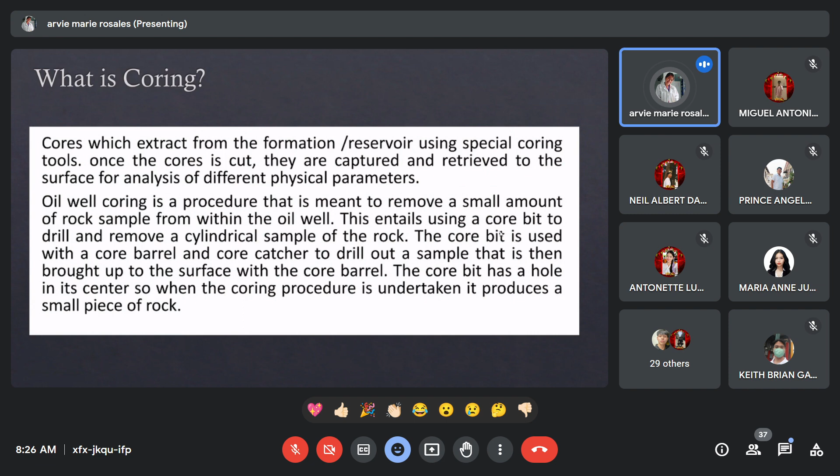So our core sample is usually cylindrical in shape. The core bit is used with a core barrel and core catcher to drill out a sample that is then brought up to the surface with the core barrel. When we define a core sample, it is a cylindrical section of a naturally occurring substance, usually obtained by drilling with special drills into the substance - for example, sediment or rock. Using a hollow steel tube called the core drill, we can obtain core samples from that sediment or rock. The hole made for the core sample is what we call the core bowling.

Later I will show you what is called the hole - that's what we call the core bowling. A variety of core samplers exist to sample different media under different conditions. There are two types of core samples: the disturbed sample and the undisturbed sample.

Okay, so what is the purpose of coring? Why do we do coring, or why do we collect core samples? First is for making reservoir analysis tests to determine porosity, permeability, residual oil, and water saturation. These parameters are what we call the primary purpose of coring.

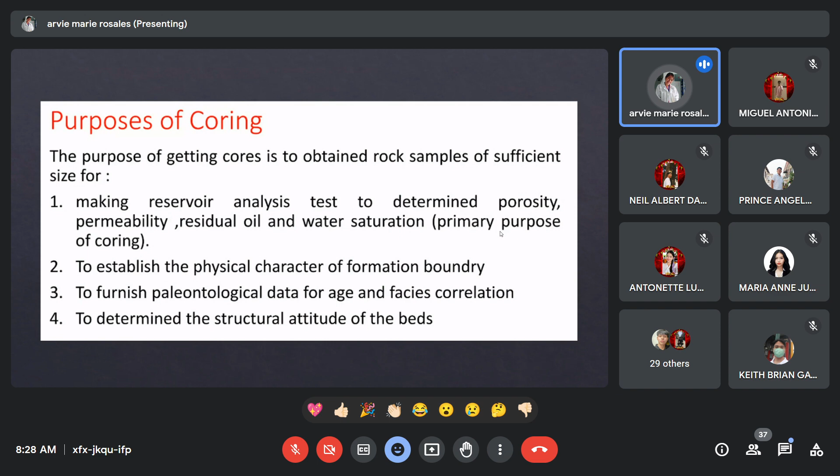That's why it's called structural attitude - because our rocks can behave depending on how they want to behave, and we can control that. That's why we need to monitor them, so we can at least find ways to keep them stable. Those ways to prevent them from behaving too much - we use alternative chemicals for that.

Okay, so let's discuss the coring method. The coring procedure should follow a systematic approach. Systematic approach means there is a step-by-step process to follow, also referred to as a rule-based approach. So we have steps on how we do coring, and we cannot do coring if we don't follow those steps. Because if we don't follow them, it is possible that we will encounter problems. That's why we should follow a systematic approach.

So the water depth should be measured using an echo sounding device. What is an echo sounding device? It is a device wherein we use sound waves. What device uses sound waves? Sonic log or acoustic log. So the tool we can use to have this echo sounding device is our sonic log.

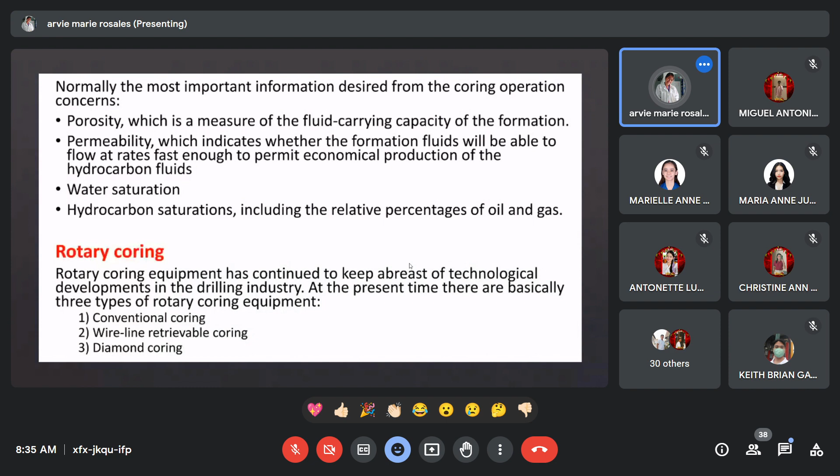So let's go to the next definition. When we say conventional coring, it is a method of drilling and acquiring rock samples to retrieve core samples. Of course, all of our ways or methods of coring are to retrieve core samples. But in conventional coring, they use a complete rod string and core barrel assembly, which has to be removed from the hole. That's conventional coring, and in it, we just get the basic information from the core sample.

When it comes to wireline coring, again, coring is to obtain samples of different rock types. Here, the assembly used for the core drilling crown consists of a sleeve reamer. So what wireline coring uses is a sleeve reamer.

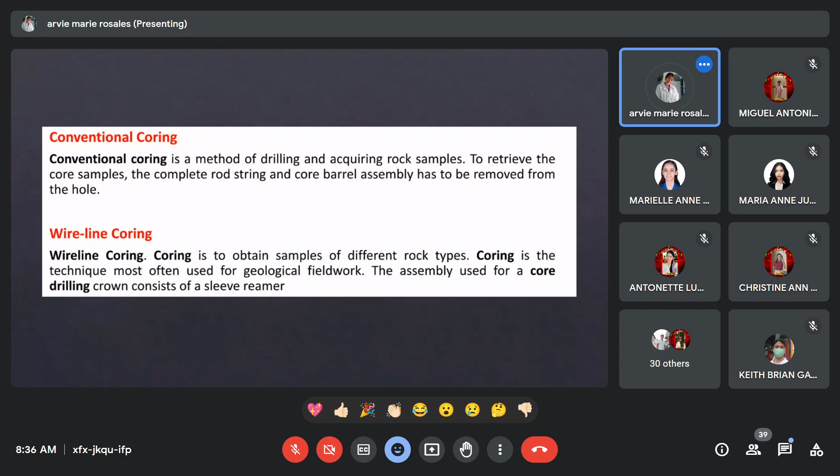Kapag sinabi natin diamond core drilling, so from the word itself, diamond, it is made of diamond-faced coring bit. These diamond bits may be used to advantage in coring hard, dense formations where the cost of coring with roller cutter bits is high. So that's the best option if we collect core samples or do coring, kasi ang kanyang material is diamond na. Mamaya, papakita ko sa inyo kung ano itsura ng mga diamond core drilling na yan.

And then meron tayo ditong another coring method, which is the sidewall coring. So it is a supplementary coring tool. It can be used in zones where core recovery by conventional or wireline method is difficult, or in zones where no cores were obtained during the drilling process.

Ano, so sa sidewall coring, ano nga yung ginagamit nating tools? We used what? Sino yun? May tumaas ang kamay. Ano ginagamit nating tools sa sidewall coring? Kabali? Tama ba? Ay, hindi pala. Sino yun? Christine Ann, Cappuccino: coring gun.

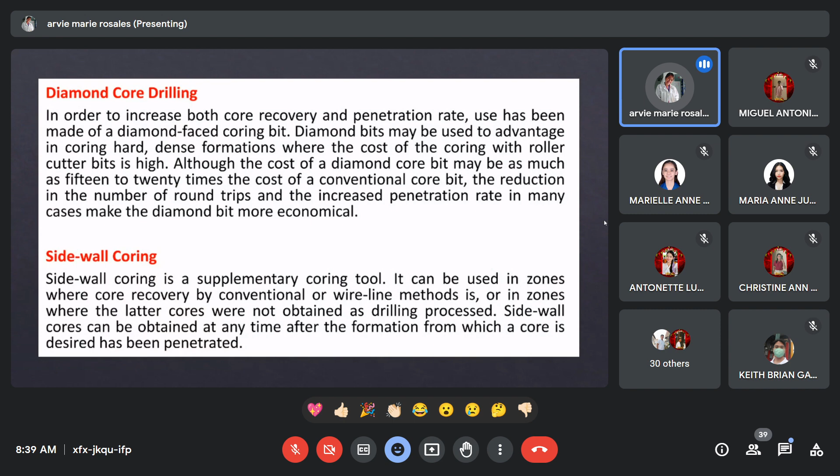Ano, so in sidewall coring, we use coring gun. And this is cheaper than the diamond core drilling.

Okay, so ito, these are the core drilling techniques. Meron pa tayong tinatawag na oil field drilling. So ang ginagamit lang sa oil field drilling is yung oil field core bit, which is ang kanyang kerf ay thick. So ito.

Sabi natin kanina may tinatawag tayong core, ano nga yun? Core bowling - it is the hole made for the core sample. So ito yun, this is area to be cut. Ito yung sa oil field drilling core bits. And as you can see, dahil mas thick ang kanyang kerf, mas malaki yung area na nakakat. And this is what we call our core bowling. Bowling nga? Core bowling. Tama?

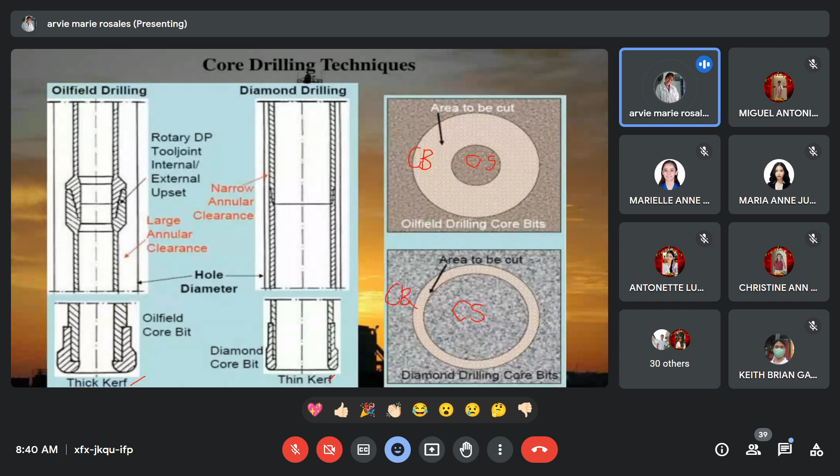Core bowling, and then ito yung ating core sample. Pagdating naman kay diamond core drilling, since meron lang siyang thin kerf, and it used diamond core bit, itong maliit na ito yun lang yung kanyang CB. And itong nasa gitnang ito yung ating core sample mismo. Naintindihan? Yes po. Okay, so these are the types of thick kerf rotary core bits na ginagamit sa ating core bit.

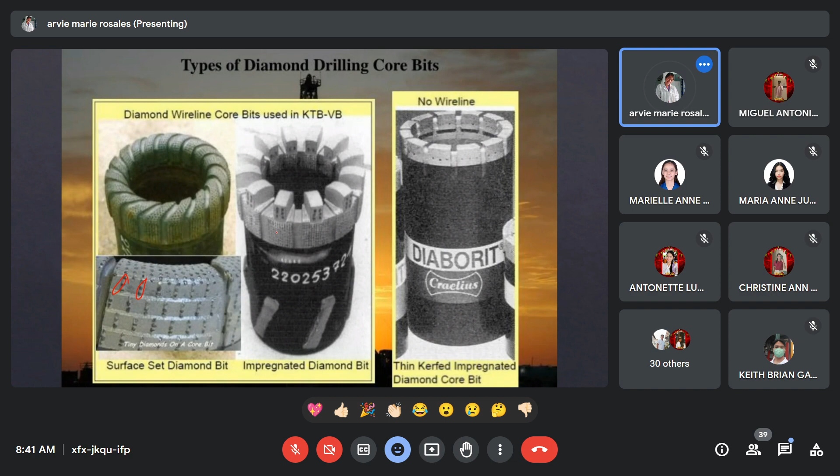So ayan, this is our diamond wireline core bits used in KTB-VB. Ito naman, pag walang wireline, ganito yung kanyang itsura. Ayan, these are the diamonds, yung mga bilog-bilog. So that is our diamonds. Ito din, nasa gilid ng diamonds.

Yes, Christine. Kasi po, kapag crosswise po, possible po na yung outside part po ng core sample ay exposed na po sa different substances outside po. So, alter na po yung parang pinaka-property po ng sample.

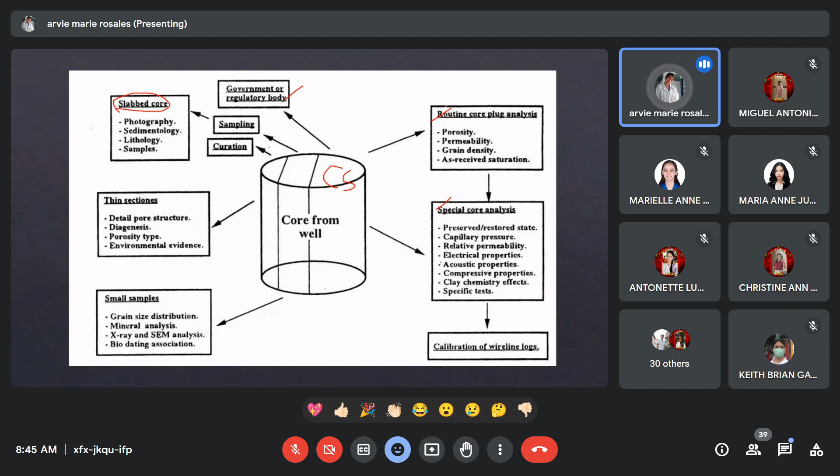Since we've already provided the conventional core barrel and diamond core barrel, we also have here a representation of what our wireline core barrel looks like, as well as the core barrel detail itself.

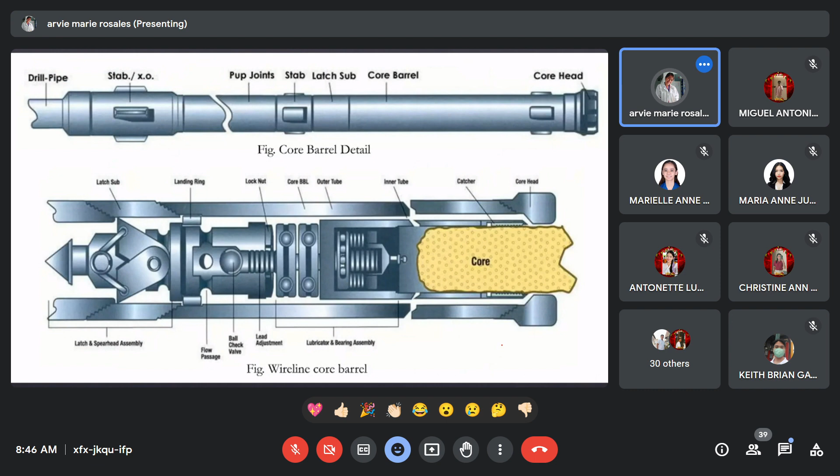Okay, so let's proceed to the core handling process that we have. As I said earlier, this core handling process is included in what we call core preservation. So in core preservation, we have three ways to preserve our core samples.

What are those? Anyone? Mark Lawrence, ma'am, I'll just try.

The first is, the core barrel is filled with resin to prevent the core from moving and to minimize the exposed surface. The second is freezing the core in freezer containers. The third is the core sample is wrapped in a plastic film, aluminum foil, and then dipped in molten wax. So those three are some ways to preserve the core sample.

So let's go through the core handling process. First, we should prepare an adequate number of boxes having rags. In those boxes there are rags placed, and after the core sample is delivered to the surface, we place it there. These boxes should be set up at the rig floor to receive the core.

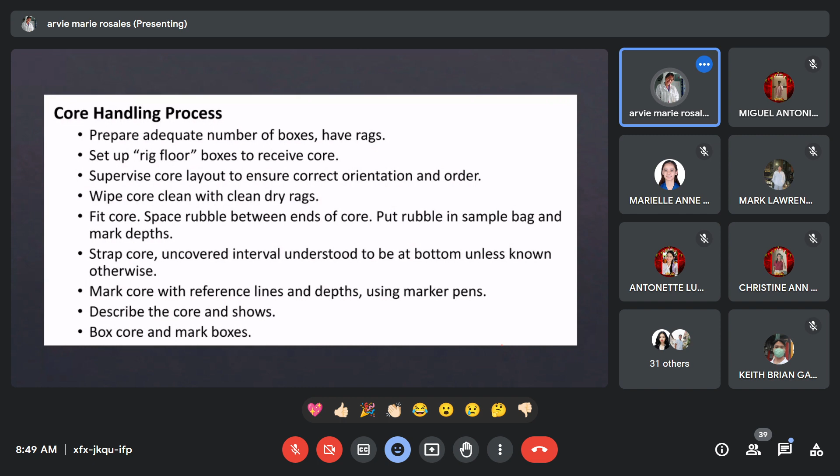Okay, let's proceed now to the importance of coring. Why is coring important? I've provided an answer for when there's a question about the importance of coring. Coring provides the only valid representation of the formation because we get contact with the original rock types of our formation beneath the surface, since we're getting core samples.

It's the only means of direct measurement. All other methods such as well logs require interpretation, while conventional well logs play an important part in reservoir identification. Only coring can ensure reliable correlation of those logs to the actual subsurface conditions, and for the most advanced analysis, only core samples can yield critical data such as porosities, permeabilities, and saturation.

Do you understand the importance of coring? Yes po. Okay, so that is all for coring.

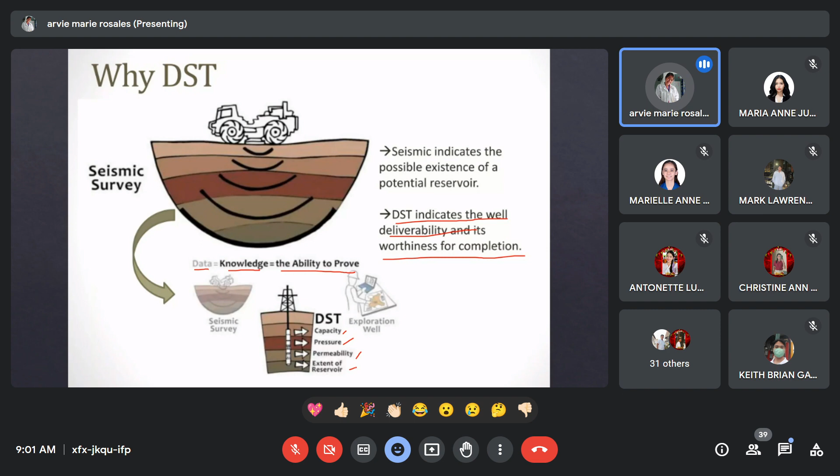Okay, now let's define DST. When we say DST, it is a temporary completion of a well bore that provides information on whether or not to complete the well. Drill stem test or DST is known as a temporary completion. That's really the keyword when it comes to DST, temporary completion.

It consists of a combination of packer arrangement and drill pipe or tubing, since it's a drill stem. We also have the presence of valves in this arrangement to open and close the tool, and pressure and temperature recording devices are employed. We actually have different kinds of valves we can use for DST, but what I placed here is the auxiliary valve, and the auxiliary valve also has two types.

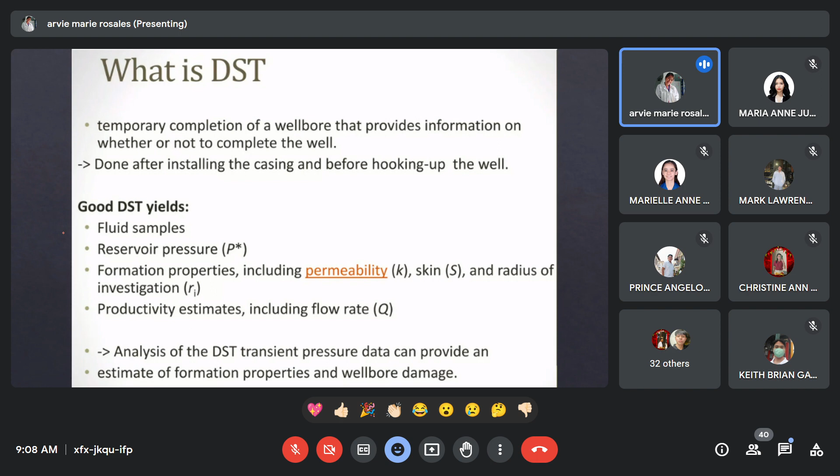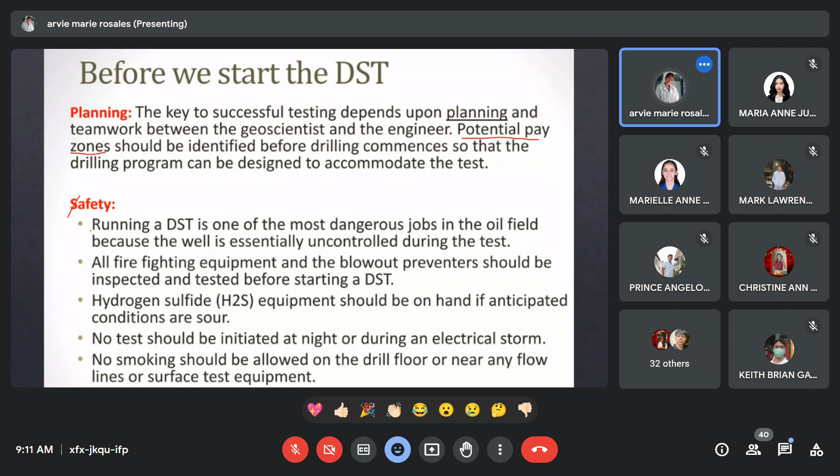No test should be initiated at night or during an electrical storm. And this is most important: no smoking should be allowed on the drill floor or near any flow lines or surface test equipment.

So how do we do DST? It is done in 4 stages: A, B, C, D. This is the representation, a typical pressure profile observed during the DST test. It is pressure versus time.

So for the short production period, we have the initial flow or IF, and initial flow is done within 5 to 10 minutes. This is where it happens, this is the part where the initial flow occurs.

Next is the short shut-in period, or our initial build-up, IBU, and it is done after 30 to 90 minutes.

Okay, next is the longer flow period. If we have short, of course we have longer because the time is longer here. So the longer flow period, or our final flow, FF, is within 1 to 5 hours. After 1 to 5 hours, this is where it happens.

So each time we have flow and then build up, our flow goes down, build up goes up, flow goes down, build up goes up.

And lastly is the longer shut-in period, or our final build-up, FBU, which is about 3 to 10 hours. So this is where it ends, 3 to 10 hours. So that is how the DST is tested within this timeframe.

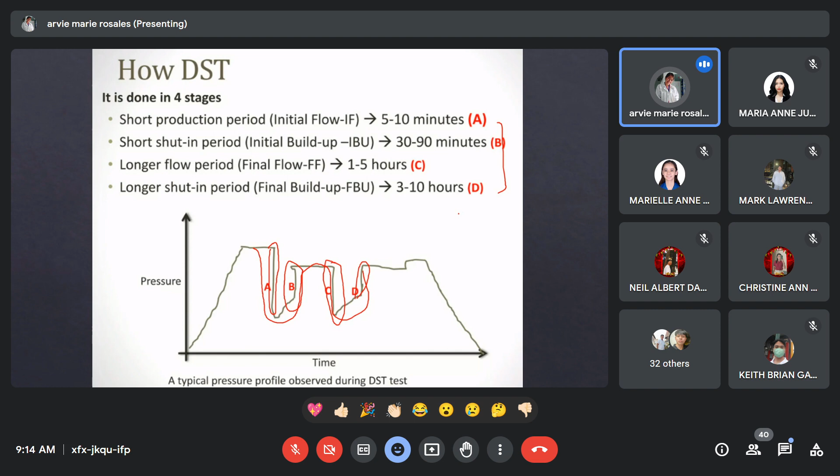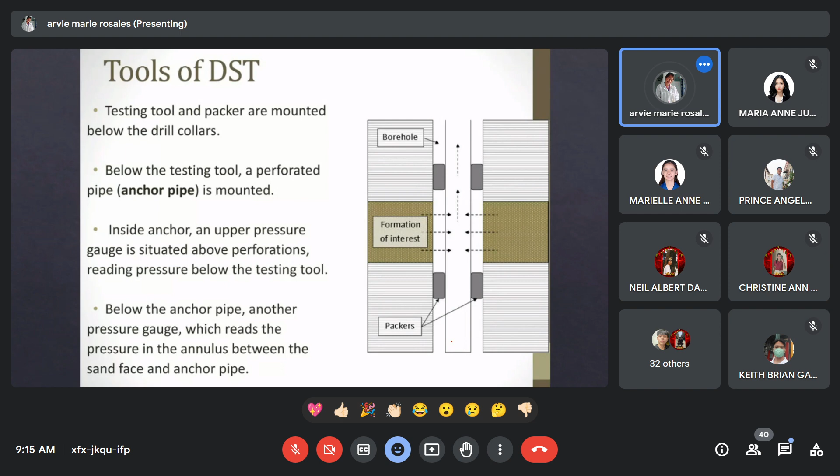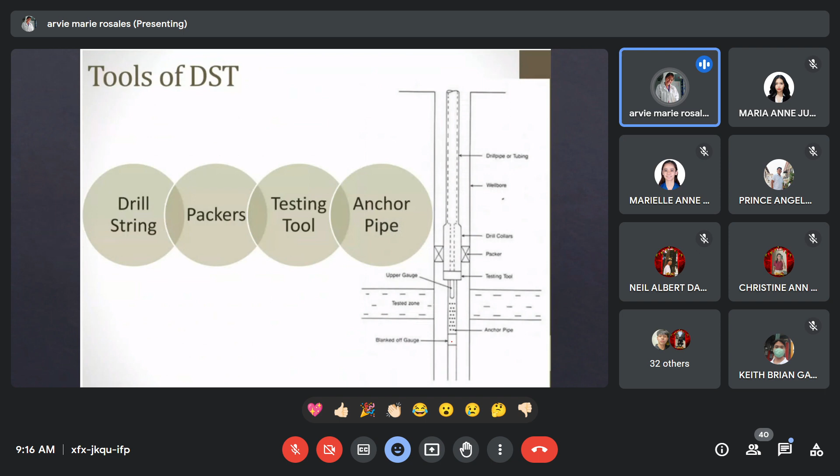Okay, so this is an example of a test valve. So when we say test valve, or what we call the tester valve, it is the major role in the drill stem test. It is placed in the upper section of the DST tool, above the hydraulic bypass valve. Let's see if it's here. Yes, it's located in the middle. And this is what it looks like.

So according to Black, during 1956, one of its main functions is to provide a passage, since this is a valve, for fluids to flow into the drill pipe when the packer is set at the annulus. Second, it prevents the drilling mud from entering the empty drill pipe.

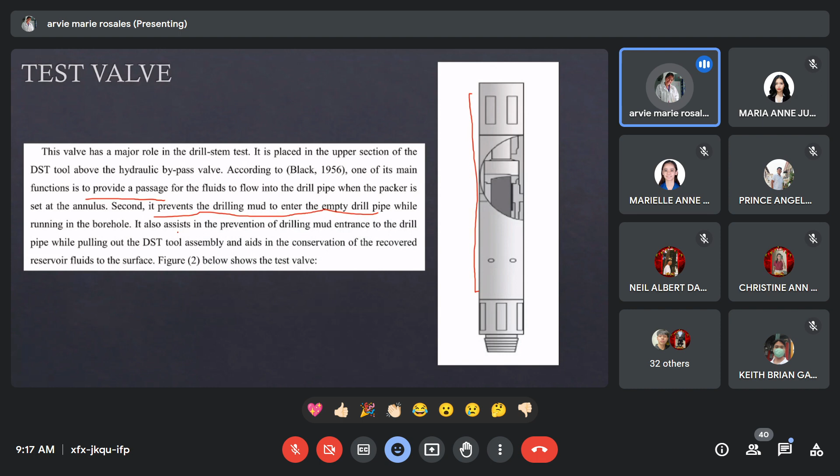Because when we say valve, it has the ability to open and close. So it opens to provide a passage for the fluids to flow into the drill pipe, and it closes to prevent the drilling mud from entering the empty drill pipe while running in the borehole. It also assists in preventing drilling mud entrance to the drill pipe while pulling out the DST tool assembly, and aids in the conservation of the recovered reservoir fluids to the surface.

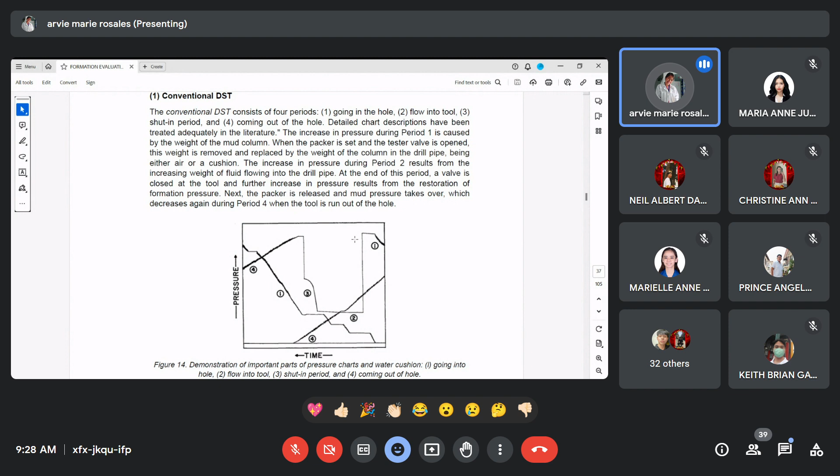Detailed chart descriptions have been treated adequately in the literature. The increase in pressure during period 1 is caused by the weight of the mud column. When the packer is set and the test valve is open, this weight is removed and replaced by the weight of the column. So when the weight or mass is lost, it is replaced by the weight of the column in the drill pipe, being either air or cushion. That's why it drops again, because our air is less dense.

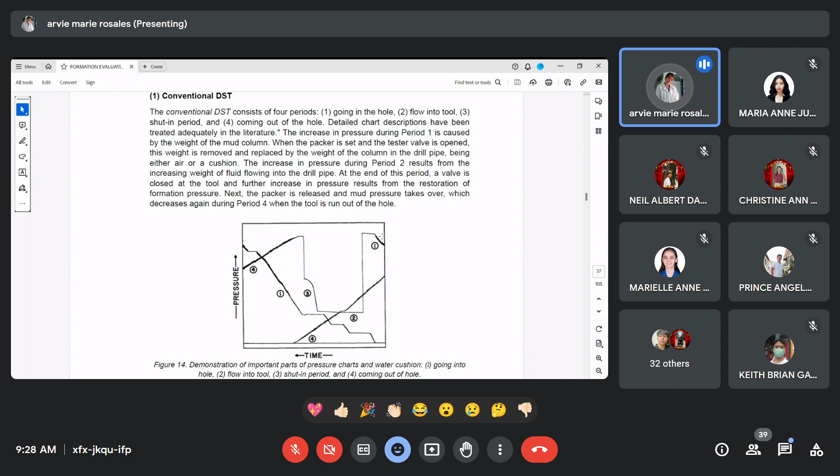The increase in pressure during period 2, we'll discuss the cushion later since we have different kinds of cushions. The increase in pressure during period 2 results from the increased weight of fluid flowing into the drill pipe. While period 1 depends on the weight of the mud column, period 2 is the increasing weight of fluid flowing into the drill pipe. At the end of this period, a valve is closed at the tool and further increase in pressure results from the restoration of formation pressure.

Next, the packer is released and the mud pressure takes over. Since we had a shut-in period, the valve causes it to decrease again during period 4 when the tool is run out of the hole.

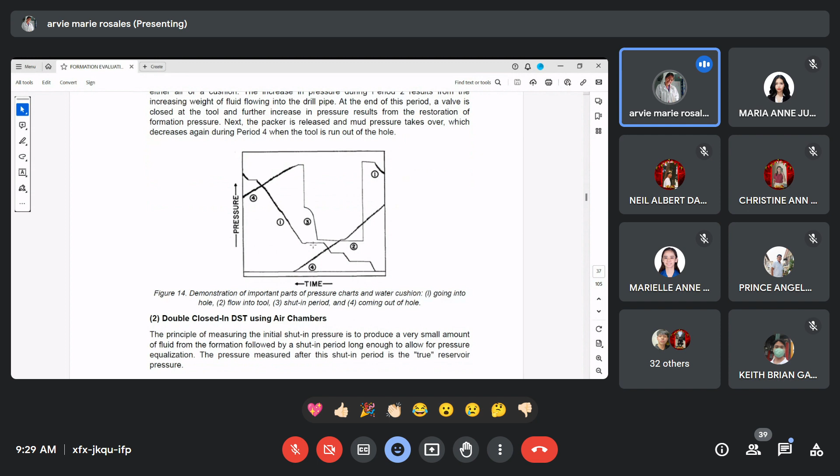Next is what we call the double closed-in DST using air chambers. The principle of measuring the initial shut-in pressure is to produce a very small amount of fluid from the formation followed by a shut-in period long enough to allow pressure equalization. The pressure we measure after the shut-in period is what we call the true reservoir pressure.

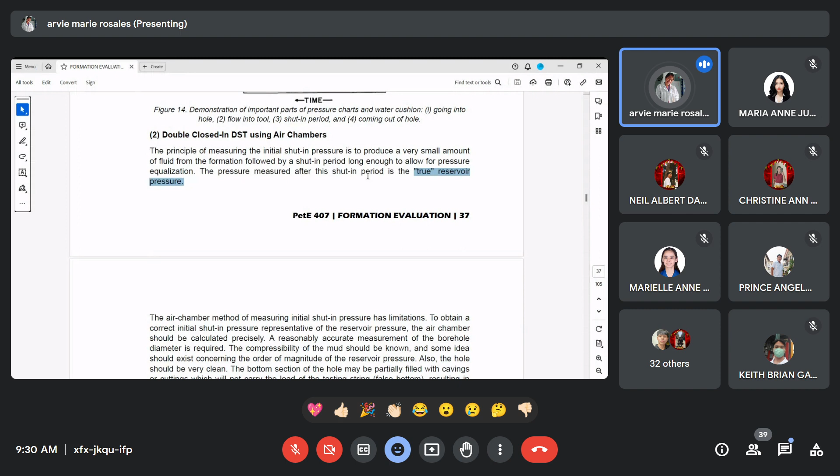Again, if we have this shut-in period, we have a measurable pressure, and that pressure is what we call the true reservoir pressure. That means it is the actual present pressure in our reservoir.

The air chamber method for measuring initial shut-in pressure has limitations. To obtain a correct initial shut-in pressure representative of the reservoir pressure, our air chamber should be calculated precisely. In the oil and gas industry we should have accurate measurements. A reasonably accurate measurement of the borehole diameter is required, and the compressibility of the mud should also be known. Again, the compressibility of the mud is handled by the auxiliary valve. And some idea should exist concerning the order of magnitude of the reservoir pressure.

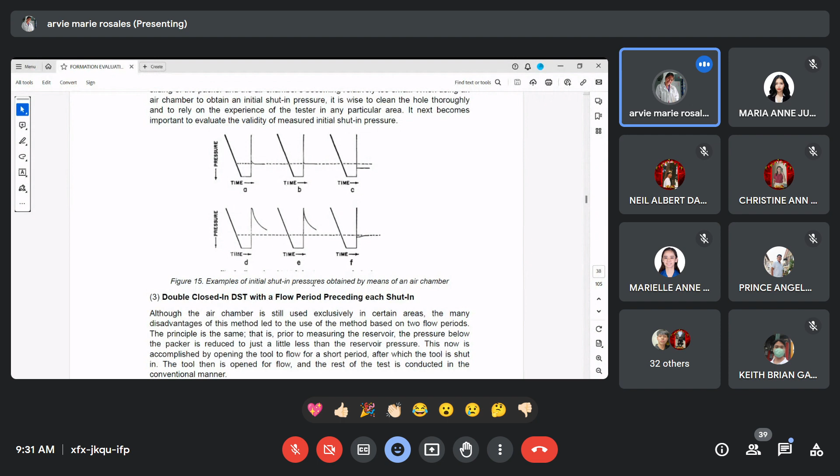Excuse me, if we have the double closed-in using air chambers, this is also a double closed-in DST, but with a flow period preceding each shut-in. Although the air chamber is still used exclusively in certain areas, many disadvantages of this method led to the use of the method based on two flow periods.

That means the reason we have a flow period preceding each shut-in is because the air chamber method showed many disadvantages. So the principle is just the same: prior to measuring the reservoir, the pressure below the packer is reduced to just a little less than the reservoir pressure. This is now accomplished by opening the tool to flow for a short period.

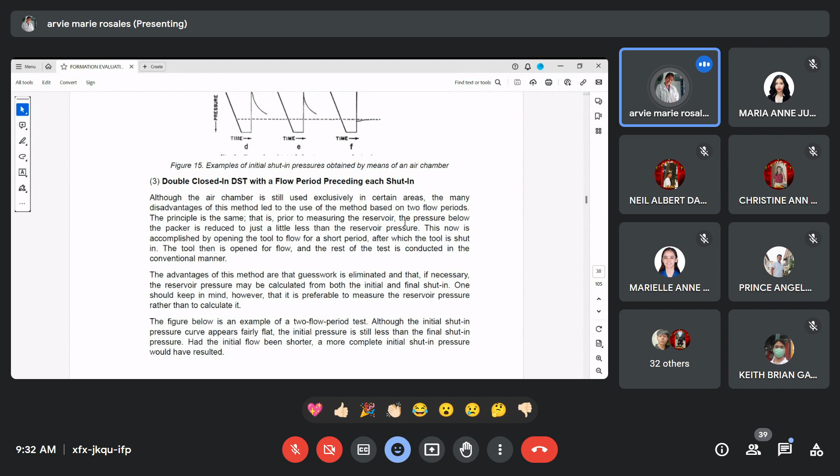The advantages of this method, since we saw disadvantages with air chambers, are that the guesswork is eliminated, and if necessary, the reservoir pressure may be calculated from both the initial and final shut-in. One should keep in mind, however, that it is preferable to measure the reservoir pressure rather than to calculate it, because when we use calculations to determine the reservoir pressure, we get discrepancies.

So the double closed-in DST with the flow period preceding each shut-in is most reliable since we measure the reservoir pressure directly, and it gives accurate measurement. The figure below is an example of a two-flow period test. Although the initial shut-in pressure curve appears fairly flat, the initial pressure is less than the final shut-in pressure. This is our initial pressure, and this is our final pressure.

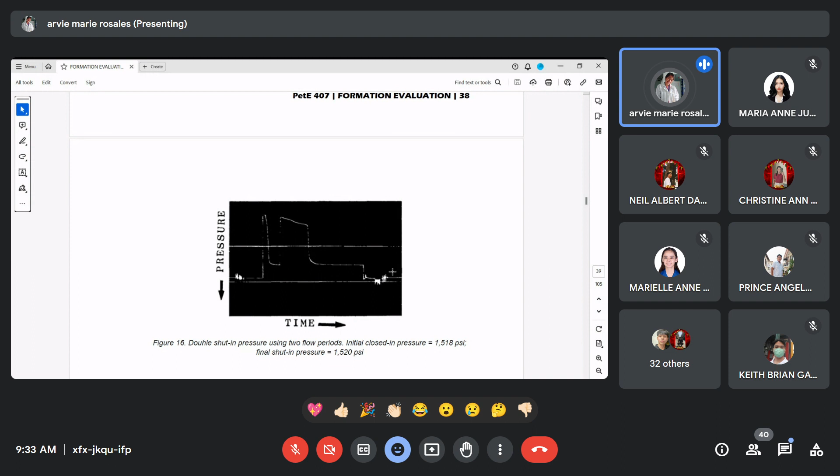So paano ba natin malalaman na mas malaki? Kasi ang ating initial shut-in pressure, hindi man kita yung pinaka-measurement, is about 1,518 PSI, and then pagdating natin sa final shut-in pressure, it arises to 1,520 PSI.

Ayan, no? Ito yung initial, ito yung final. So for the interpretation, the theory of pressure buildup interpretation and extrapolation has been covered extensively in the literature. Usually, the buildup pressures are plotted versus log 10.

T plus theta over theta, where T is the time the tool was open to the flow, and theta is the time the tool was closed during the final shut-in period.

So the best straight line is drawn through these points, and this extended to intersect the line for which this formula should be equal to 1.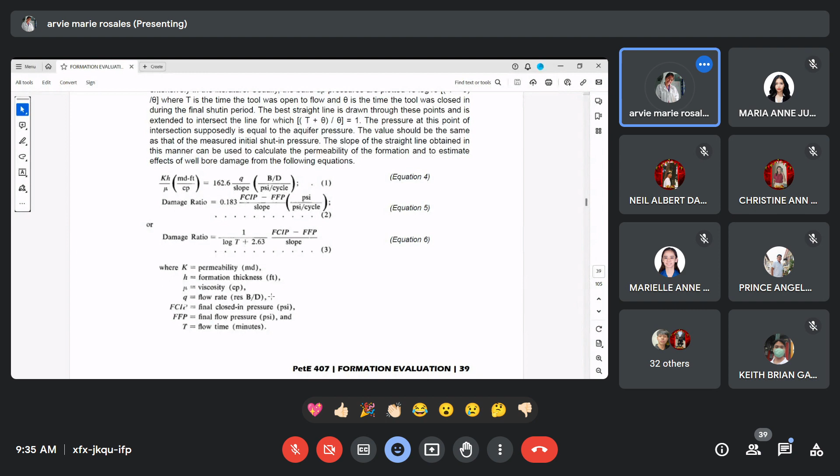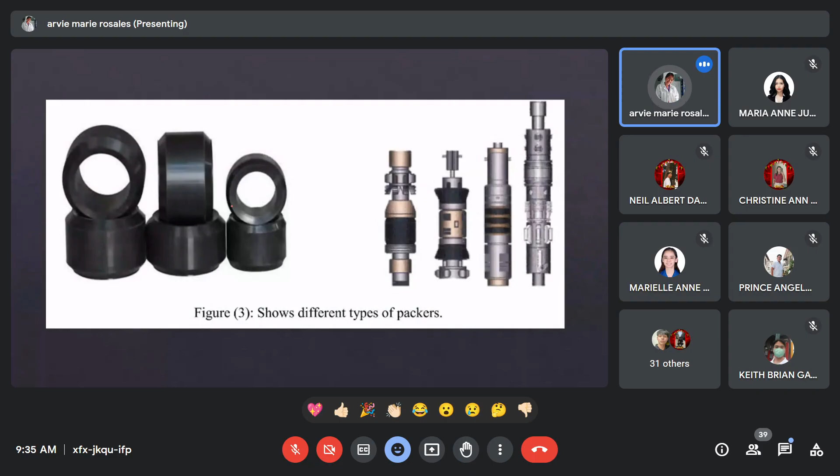Balik tayo dun sa... okay, so ayan nga na. So these are the examples, ganyan yung itsura ng mga packers.

So it is just good to know if the well bore is filled with mud. So during the DST, the string is partially filled with cushion. Kapag full of mud, during the DST, meron tayong tinatawag na cushion. So mamaya natin i-discuss kung ano yung iba't ibang cushion na meron tayo.

The testing tool isolates the overlaying drill collars and drill pipes from the mud present in the well, and an empty string remain empty as it is lowered. So ito yung ating different cushions: we have the water, the diesel, the nitrogen, and natural gas.

So bakit nga ba natin kailangan ng cushion fluids? So first is to protect the drill string from collapsing. Second is to reduce the inertia of formation fluid as they enter the pipe.

So para mapigilan, kasi kapag yan ay nagkaroon ng malakas na inertia, and inertia is known as a pressure, dadagdag siya doon sa pressure na existing doon sa ating pipe. So baka magkaroon tayo ng tinatawag na kick or blowout.

So for unconsolidated formation, pressure exerted by the cushion is about 400 psi difference or less from formation pressure to prevent sand production, gravel pack plugging, and fracture proppant production.

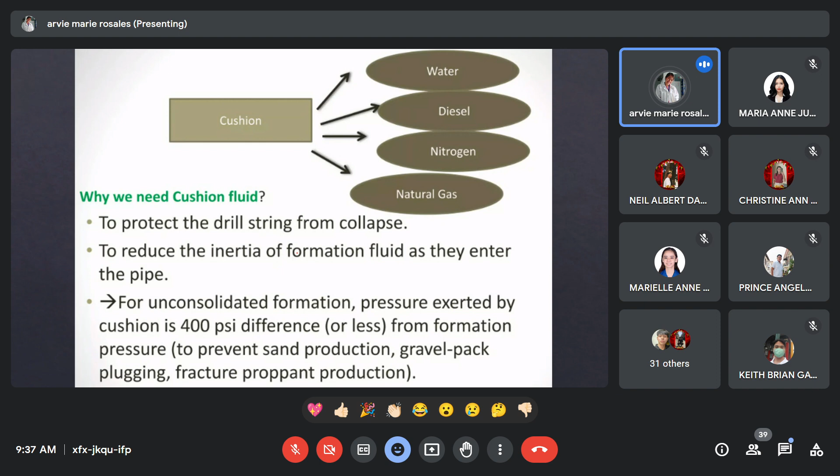So ayun, do you have questions about drill stem test? May question kayo? Meron, wala. Question po. We have still time, so ating sagadin.

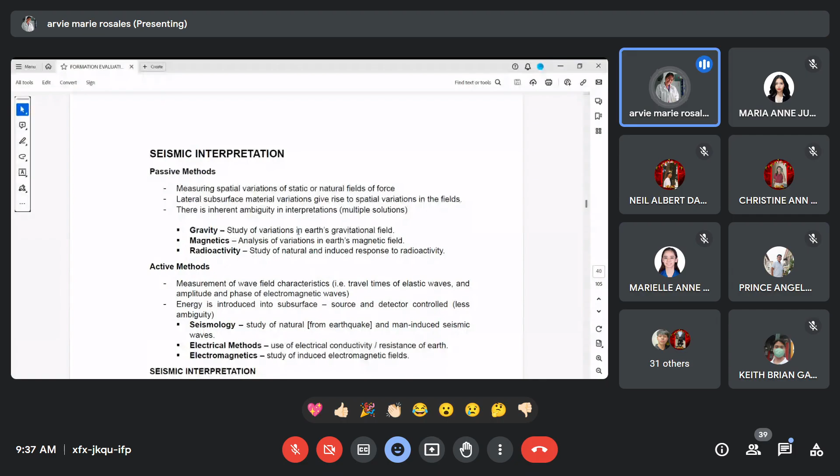Okay, so let's now proceed to the seismic interpretation. So in seismic interpretation, we have here the two methods: we have the passive and the active.

So sa passive, it is just measuring spatial variations of static or natural fields of force. So lateral subsurface material variations give rise to spatial variations in the fields, and there is inherent ambiguity in interpretations, or we have multiple solutions.

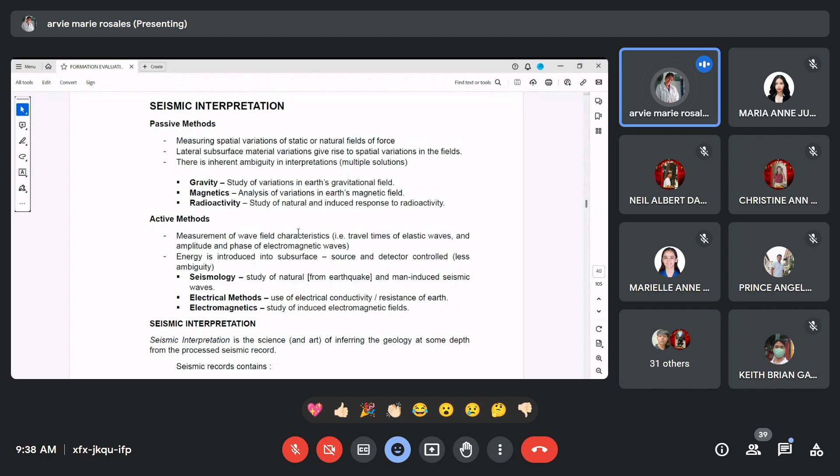So under the passive method, we have gravity, magnetics, and radioactivity. Gravity, syempre, study of variations in Earth's gravitational field. Magnetics is the analysis of variations in Earth's magnetic field, and radioactivity is the study of natural and induced response to radioactivity. Okay, active methods naman...

It is the measurement of wave field characteristics such as travel times of elastic waves and amplitude and phase of electromagnetic waves. So ito ay more on waves. Energy is introduced into subsurface. Given that it has energy, it is possible that there is also a presence of electricity.

So energy, subsurface, it's the source and detector controlled, and we have less ambiguity compared to passive methods. So under naman na active methods, we have also three: the seismology, the electrical methods, and electromagnetics.

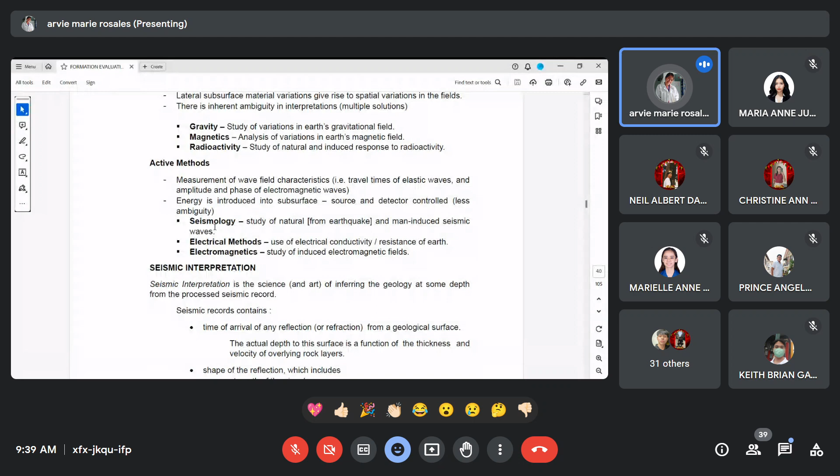So seismology, kabaligtaran siya ni radioactivity, it is the study of natural and man-made or man-induced seismic waves. Electrical methods, syempre, used of electrical conductivity and resistance of Earth. And then sa electromagnetics, we are using induced, or it is the study of induced electromagnetic fields.

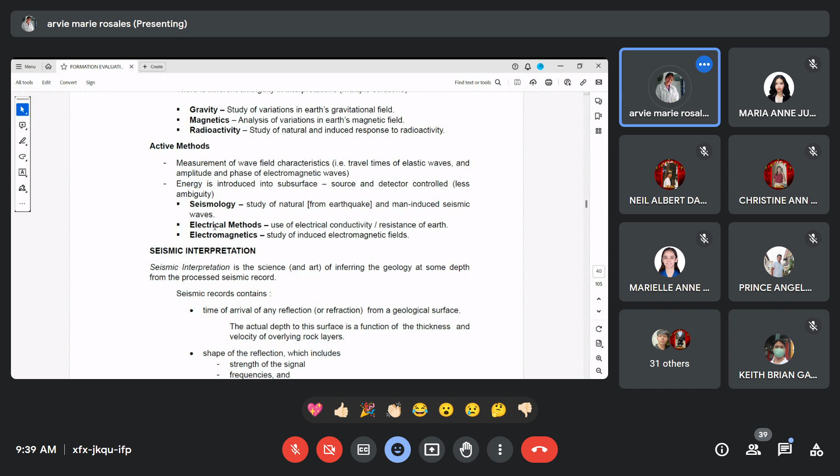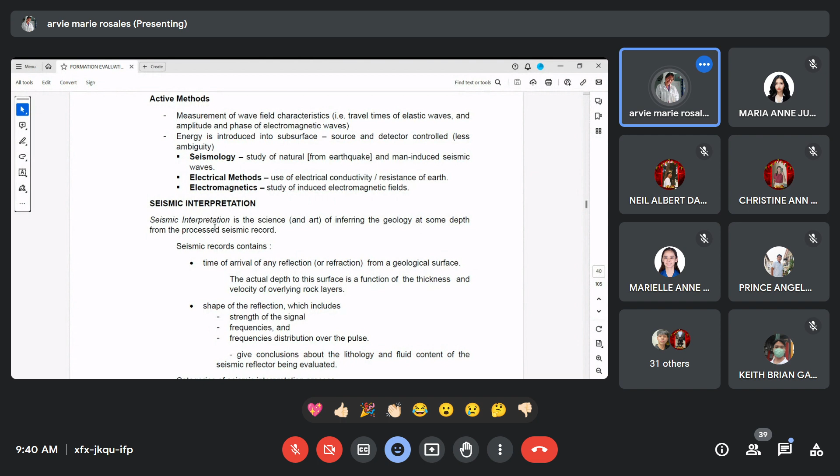So when we say seismic interpretation, it is the science or art of inferring the geology at some depth from the processed seismic records. So some of our seismic records, we have the time of arrival of any reflection or refraction.

Alam niyo ba yung reflection and refraction? Usually siya ay saan nakikita? Saan? Yes, kabali. Ang tanda ko po ay sa mirror po. Mirror and? Ano pa yung isa? Kapag po reflection ay water po.

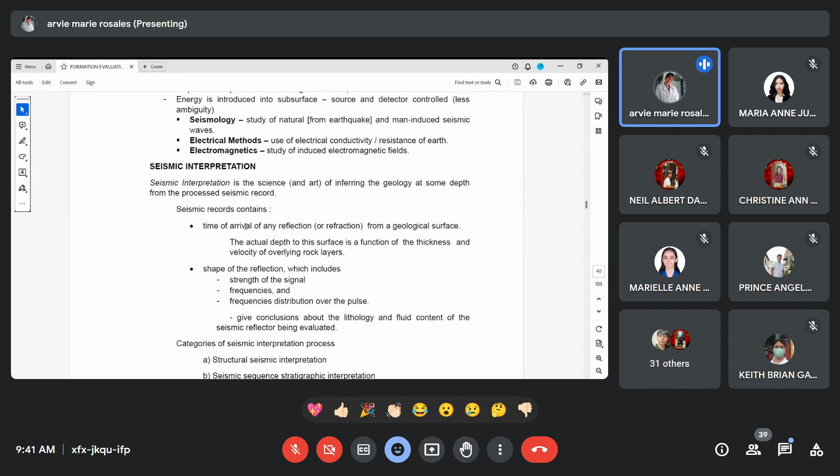It is from a geological surface. So the actual depth of this surface is a function of the thickness and velocity of overlying rock layers.

The shape of the reflection, which is part of the seismic records that seismic interpretation contains, includes the strength of the signal, frequencies, and frequency distribution over the pulse. The frequency distribution over the pulse can give conclusions about the lithology and fluid content of the seismic reflector

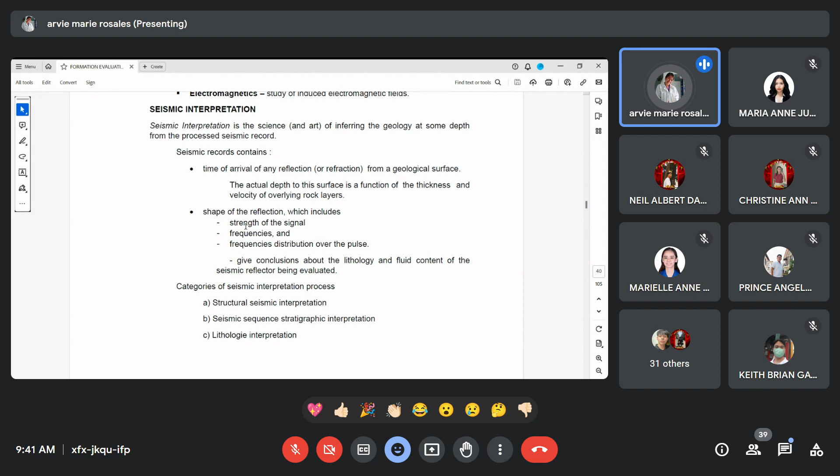being evaluated. So we have the categories of the seismic interpretation process. First is structural seismic interpretation. Next is seismic sequence stratigraphic interpretation, and then lithologic interpretation.

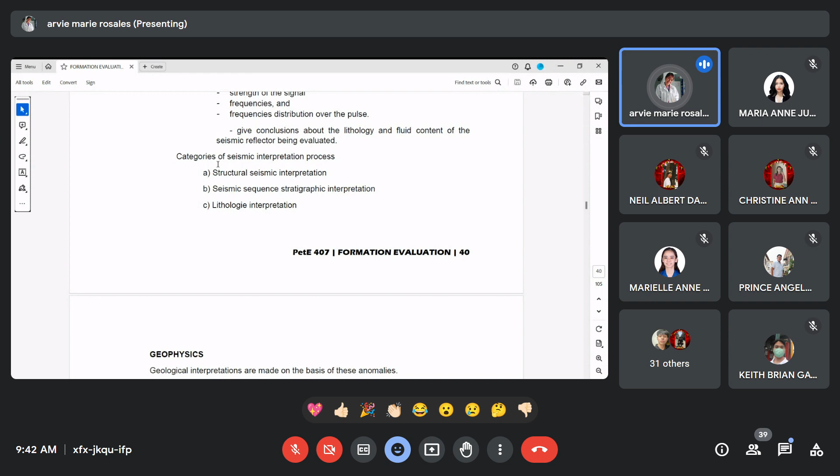Okay, so let's proceed to geophysics. Geophysics is about geological interpretations made on the basis of these anomalies.

An incredible 3D seismic line across a structurally complex area in the North Sea, once thought to be an impact site, is now thought to be a collapse structure. As you can see, we have waves there.

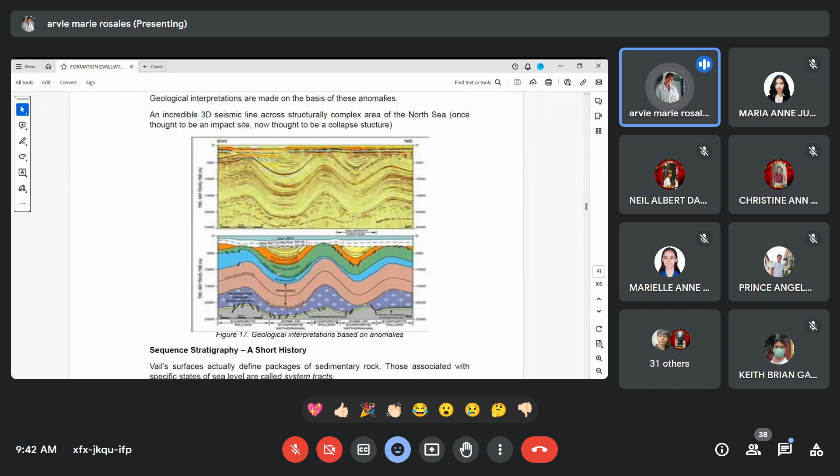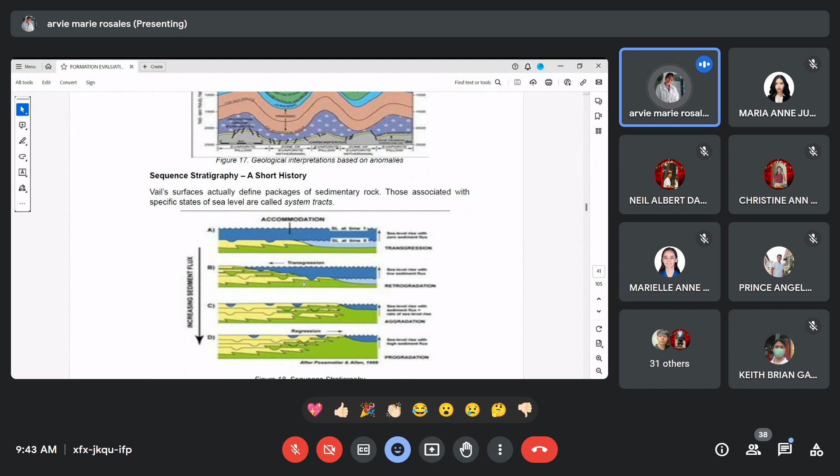Let's proceed, since our chapter 4 is about sequence stratigraphy. Let's have a short history about sequence stratigraphy.

So we have here the bounding surfaces, which define packages of sedimentary rock, and those associated with specific states of sea level are called systems tracts.

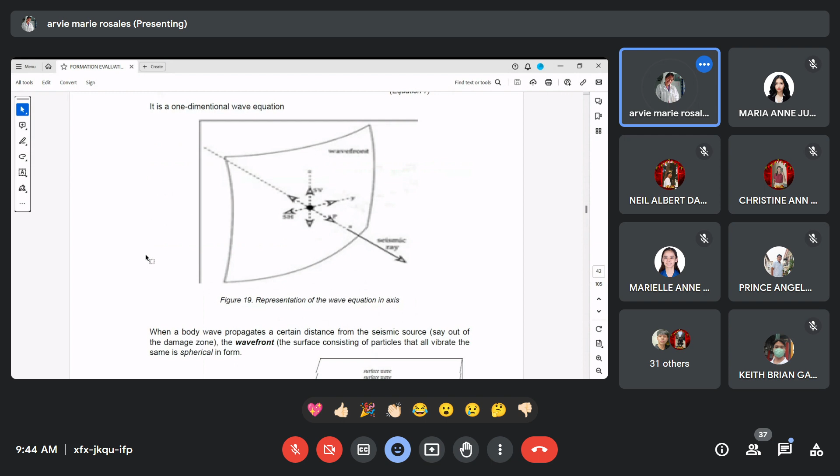So when a body wave propagates a certain distance from the seismic source, out of the so-called damage zone, we have what we call the wave front. When we say wave front, this is the surface consisting of particles that all vibrate the same, and it is spherical in form. Spherical means round, so that's it.

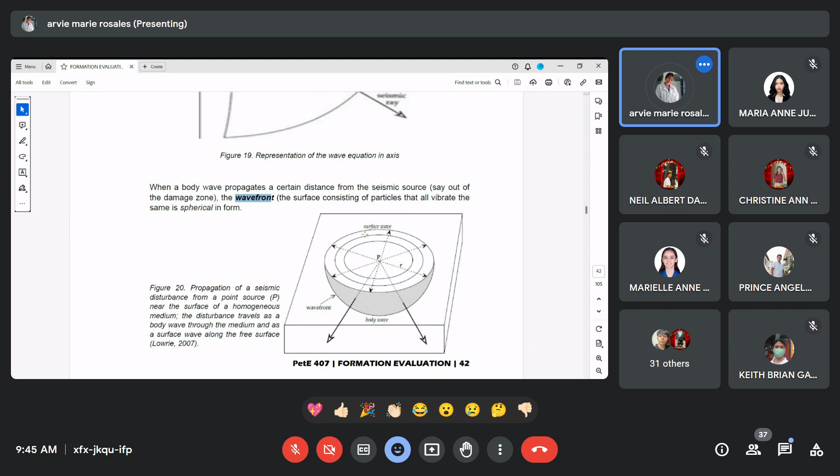So this is our wave front, this is our body wave, and this is our surface wave. We also have what's called a plane wave. At great distance, the spherical shape of the wave flattens out significantly, forming a plane wave.

Since we are talking about waves, surface waves spread out over the surface and are analogous to ripples on the surface of a pool of water.

Now we have two categories of surface waves. Actually, there are 4 types of waves, but here only two are given, which are the categories of surface waves, collectively called L waves. We have the Love waves and the Rayleigh waves.

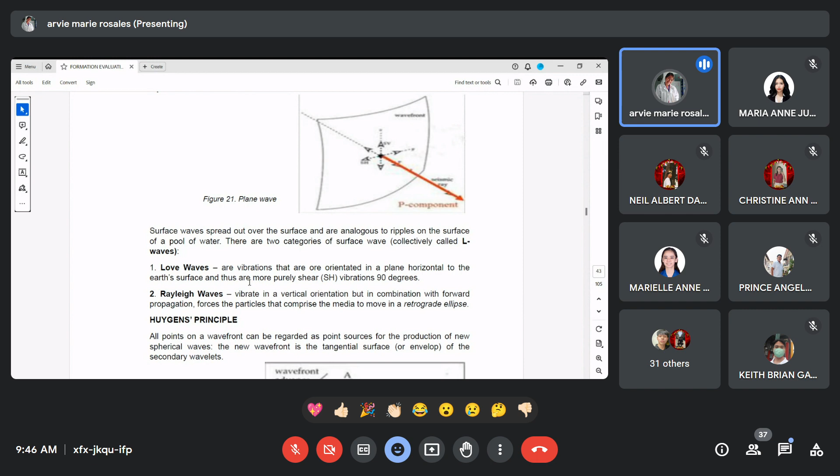We'll have further discussion about these waves, and I'll show you their difference based on their representation. When we say Love waves, these are the vibrations that are oriented in a plane horizontal to the Earth's surface and are thus more purely shear vibrations by 90 degrees. That's why they're called L waves.

When it's Rayleigh waves, they vibrate in a vertical orientation, but in combination with forward propagation, they force the particles that comprise the media to move in a retrograde ellipse.

In wave theory, we have what we call the Huygens principle. I'm not sure if I'm reading it right—Huygens. So all points on a wave front can be regarded as point sources for the production of new spherical waves.

So the new wave front is the tangential surface, or envelope, of the secondary wavelets. For example, this is what we call the wave front.

So now, they can be used to produce spherical waves. As you can see, we have the production of spherical waves here.

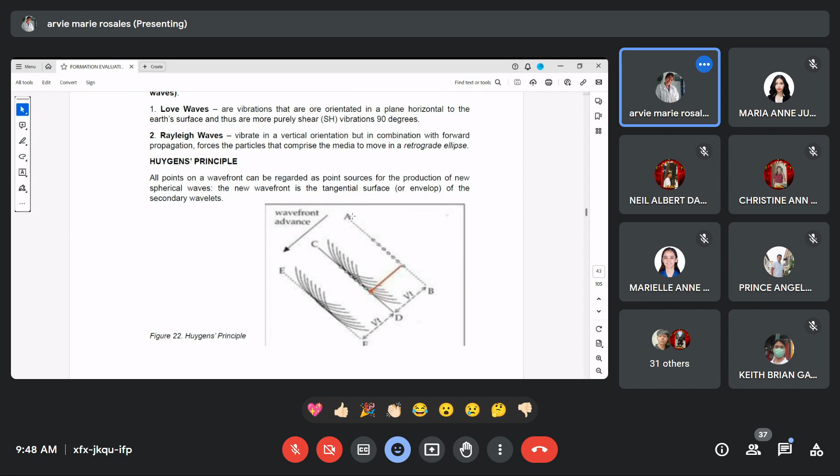Wait, that's wrong. This is what we call the wave front—this point A, point B. And then, they can be used, as you can see we have different point sources here. It gets copied here, and because of the use of those point sources, we get the production of new spherical waves.

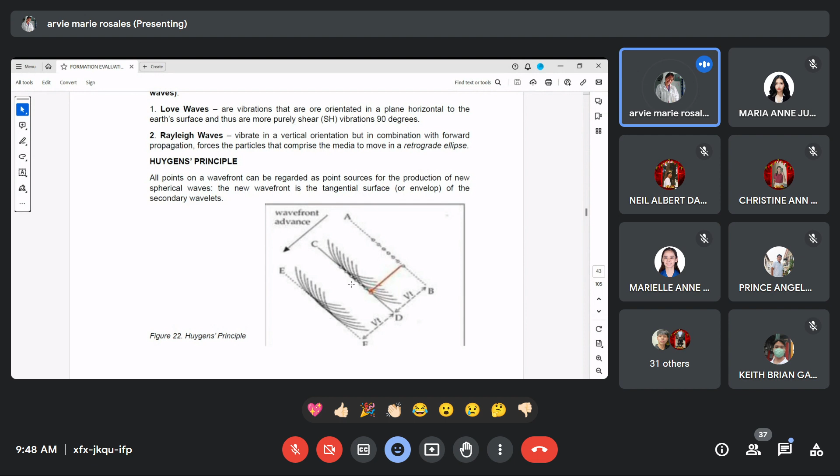So this is just a reflection of the wave front back into the original media. We have here point A and B. When the signal is going here, it will reflect there. We have here what's called a mirror, so it reflects to the other side, and this one also reflects back. Spherical waves are formed here.

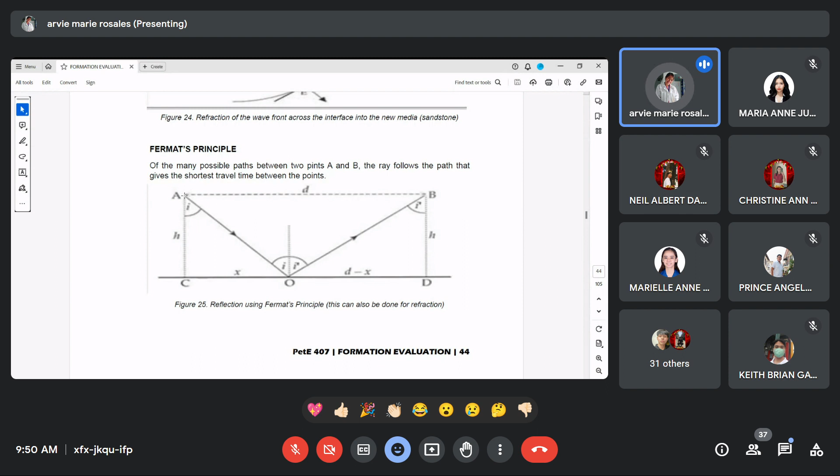Aside from Huygens' principle, we have what's called Fermat's principle. Of the many possible paths between two points A and B, the ray follows the path that gives the shortest travel time between the points. So from point A to B, the ray or signal from A will look for the path that gives it the shortest travel time to the other point, which it cannot directly see.

Okay, let's proceed to Snell's law. Wait, let's go back. Snell's law.

So for Snell's law, it just describes quantitatively how wave fronts refract or bend at boundaries between contrasting velocities. You've seen it manifest in light waves by the apparent bend of a straw in your glass of water. Light travels slower in water than it does in air. So refraction is well illustrated using Huygens' principle.

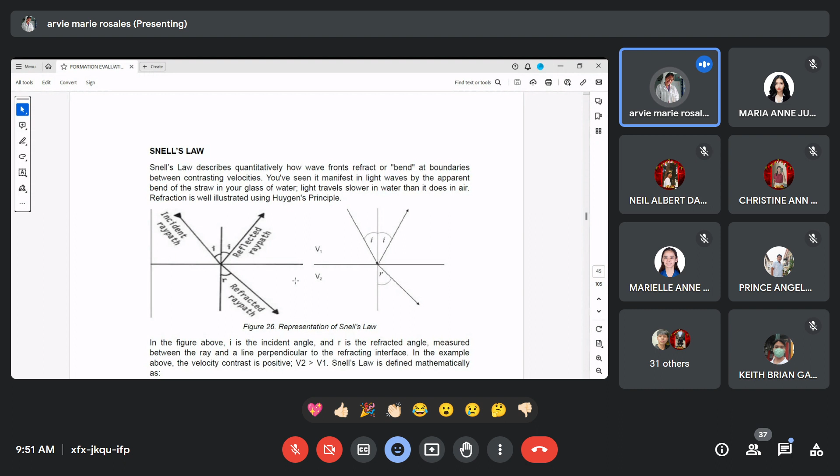So how does it work? This is our incident ray path, and this is what we call like a mirror, and our eye is here. Now if the light goes here, if reflection happens, it just mirrors its ray of light. But if it refracts, it goes to the other side instead. So this is the refracted ray path.

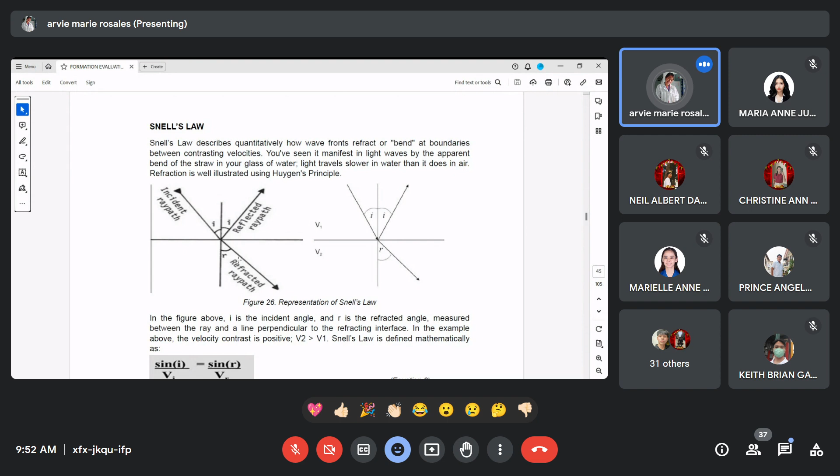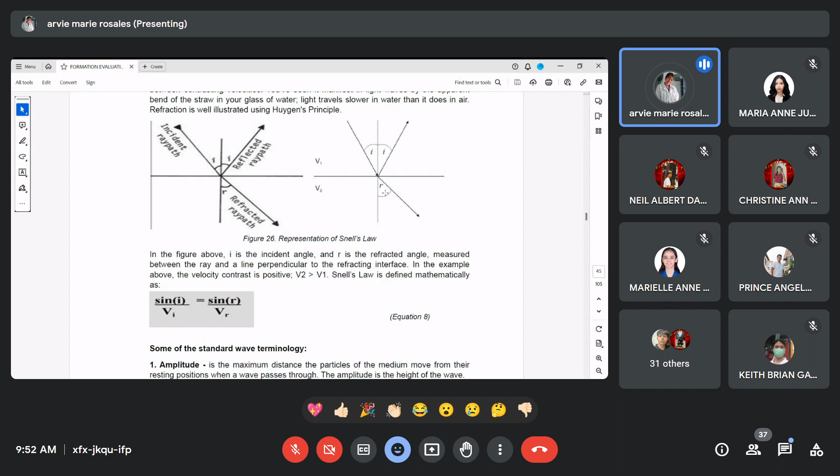In the figure above, I is the incident angle and R is the refracted angle, measured between the ray and the line perpendicular to the refracting interface. In the example above, the velocity contrast is positive, meaning V2 is greater than V1. So we can now define Snell's law mathematically as: sine I over V1 is equal to sine R over V2.

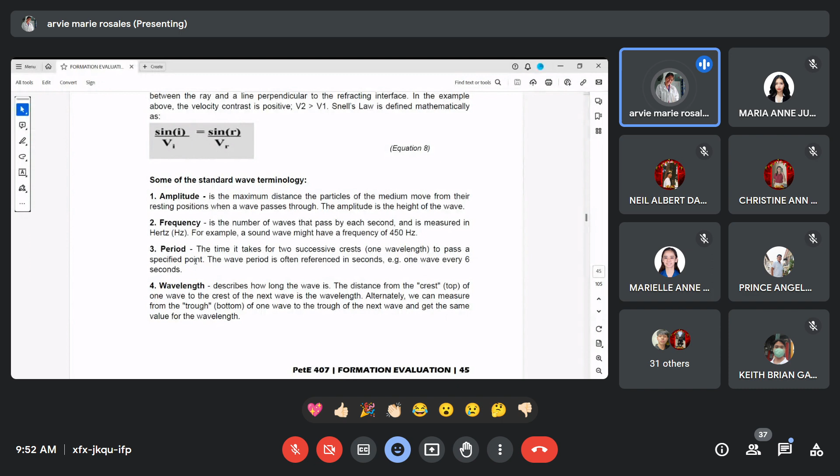Let's have here some of the standard wave terminology: amplitude, frequency, period, and wavelength. Amplitude is the maximum distance the particles of the medium move from their resting positions when a wave passes through. So our amplitude is this and this.

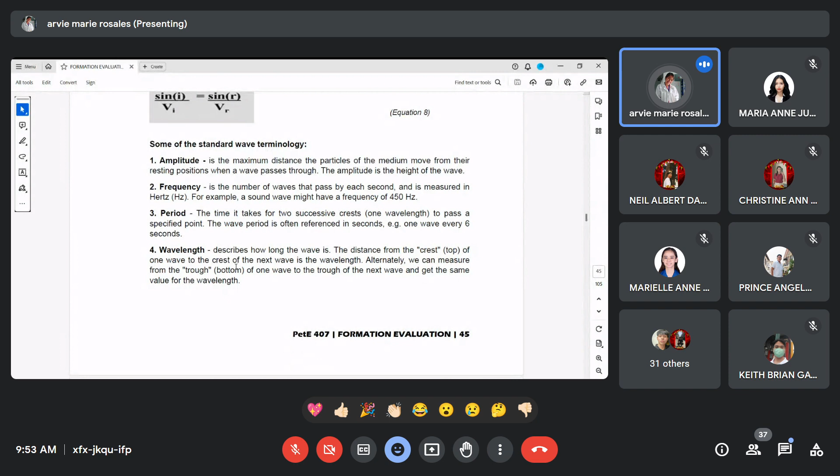That's because that's the movement of our object. Frequency is the number of waves that pass by each second, measured in hertz. For example, a sound wave might have a frequency of 450 hertz, which is a measurement of the number of waves.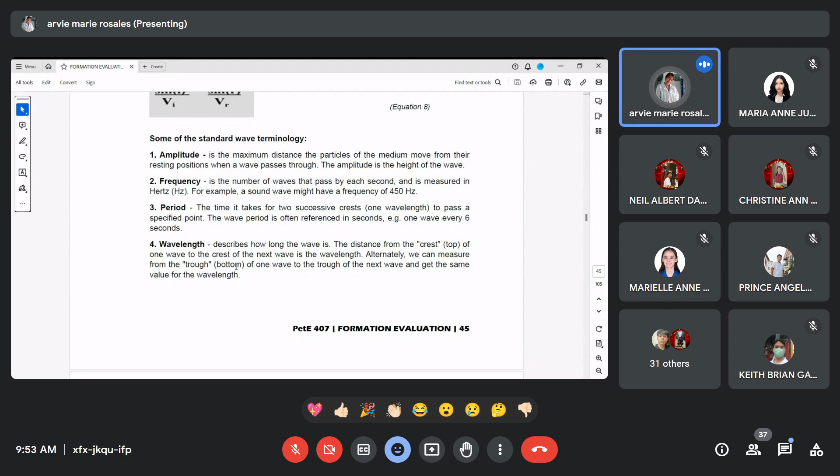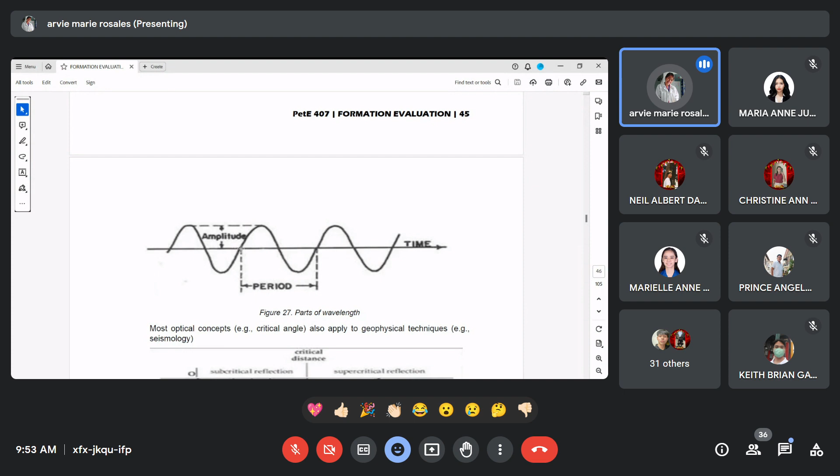Period is the time it takes for two successive crests, or one wavelength, to pass a specific point. For example, from here, one wavelength looks like this - that's our one wavelength. So to get the period, how this wavelength travels, we just measure it from here to the end of its wavelength.

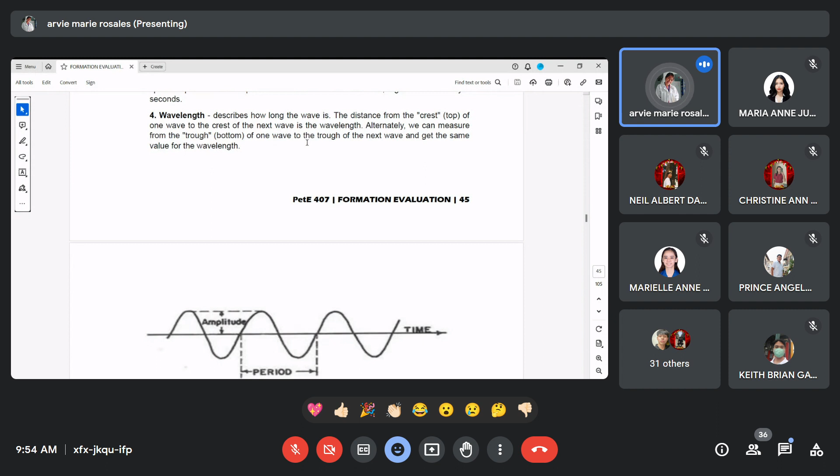Wavelength describes how long the wave is - the distance from the crest, this top, of one wave to the crest of the next wave is the wavelength. Alternately, we can measure it from the bottom if you want to start there. So if we start at the bottom, that's one wave, one wavelength. Then if we start at the top, that's also one wavelength.